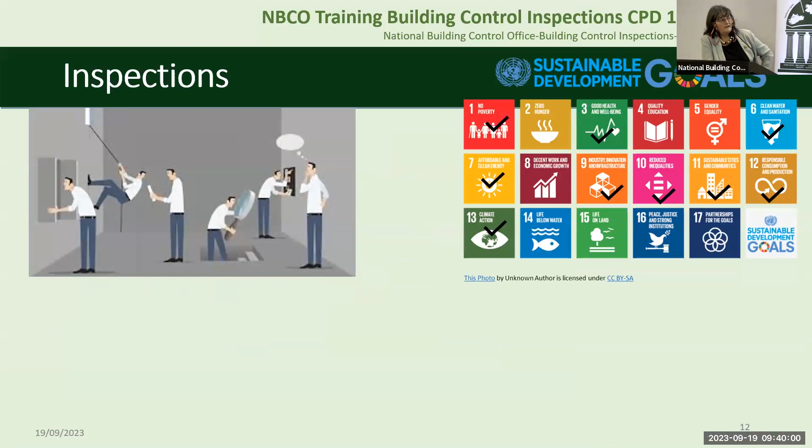Economic development, enabling economic development in every local authority. As I've said, and I can't help repeating it, promoting health, safety and welfare of people in or about buildings. It's about people in or about buildings, conservation of fuel and energy for people, and access for people with disabilities. So it's the health and safety of people we're talking about.

90% of us spend 90% of our lives indoors, so we need a healthy environment with good quality air, light, thermal comfort and water. We need to remember that. We're not just providing a bit of shelter from the rain anymore - we're providing places for people to live.

We promote regulatory compliance. We're an enabler of economic development, and we need confidence in the building industry for people - a good quality built environment, fit for purpose. Consumer protection - why consumer protection? Because the consumers are people. We need to think that we cannot deal with people and their buildings and houses separately.

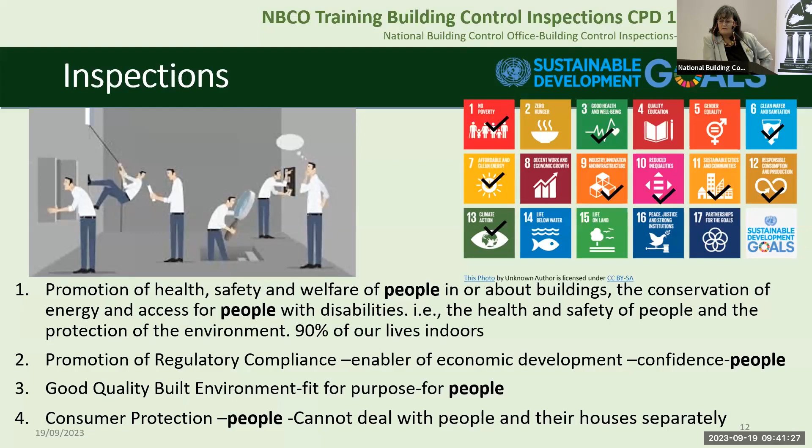So the building legislative framework - most of us know about this, but if you don't, that's it there. We have the Parent Act, the Building Control Act, which provides for the Building Control Regulations. They're the controls to demonstrate how you comply with the requirements of the building regulations.

Building control officers also have functions under the EU Construction Products Regulations, for which we are market surveillance authorities, and under the EU Energy Performance of Buildings Regulations, for which we must ensure every building, before it's opened, occupied or used, has a BER compliant with the requirements. So energy, health, safety, welfare - that's what that's about.

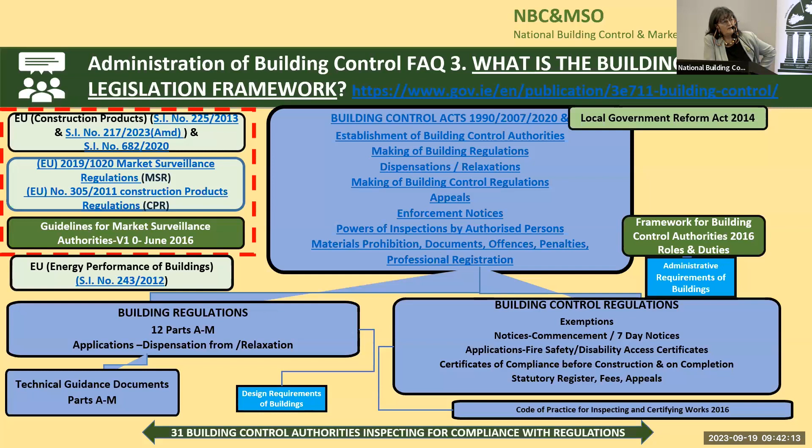Today we're talking about inspections, and building control officers are given significant powers of inspection as authorised officers under Section 11 of the Building Control Act. An authorised officer can enter a building at all reasonable times to inspect any building or plans following its completion, five years after completion, during its construction, or during the installation of any services, fittings or equipment.

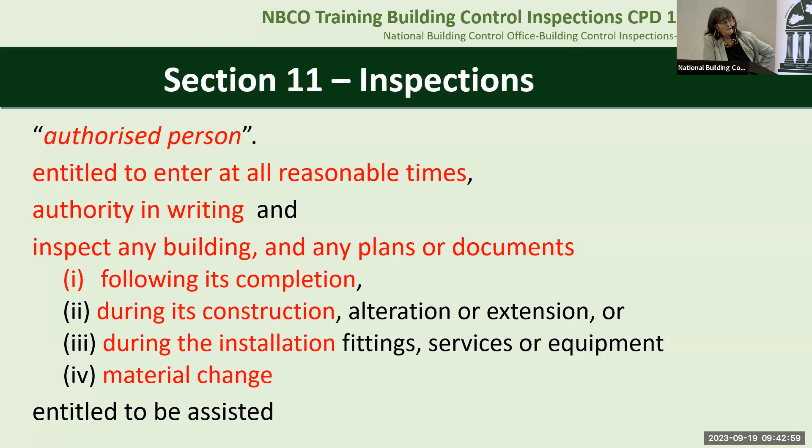Services, fittings or equipment come under Part L - conservation of fuel and energy; Part H - drainage and wastewater treatment systems; Part G - every time you replace a cistern; and Part J - your flues and chimneys. So they can inspect material change.

Regarding powers, they must be informed by the owner or occupier of the purpose of the building. What are you using this building for? If it's meant to be built for one family, why have you got 20 people living in it, made up of 3 families?

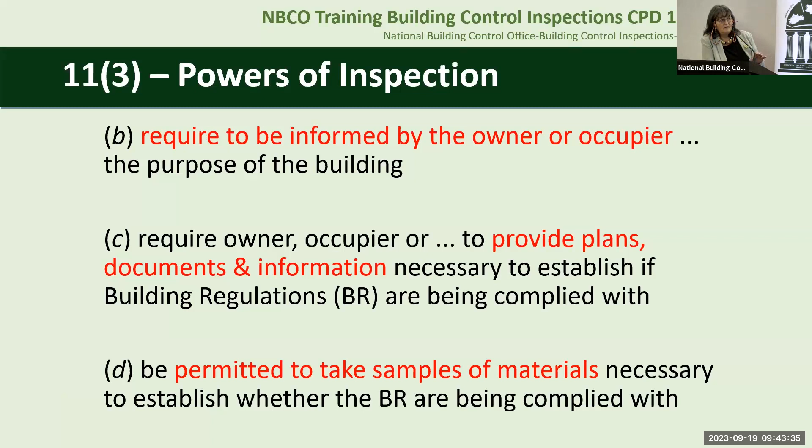They can require the owner or occupier to provide plans, documents and information necessary to establish if the building regulations are being complied with, and be permitted to take samples of materials necessary to establish this. So we can request information, request plans, documents, the use of the building, and take samples.

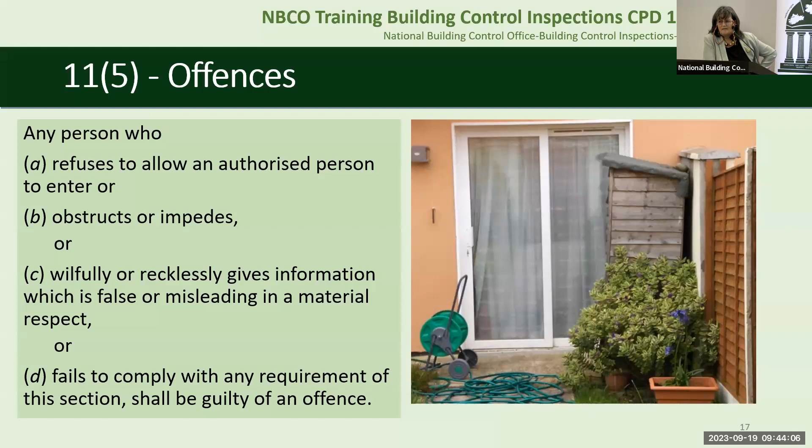We need to remember that any person who refuses to allow an authorised person to enter, or obstructs an authorised person, or gives false or misleading information to an authorised person, is guilty of an offence and can be prosecuted - no more than you would give false or misleading information to the Revenue Commissioners. You should not give false or misleading information to your building control. It's the same penalty, the same offence, a very serious offence, and people need to remember that.

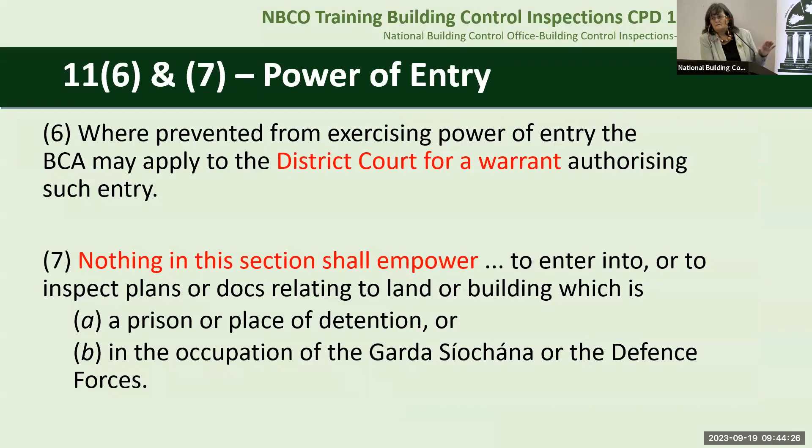Building control officers have power of entry, and if refused entry, they can get a District Court warrant and enter the premises. Under building control officers' regulations, and as most sensible people do, we stay out of Garda stations and buildings like that, and prisons, so we don't inspect those.

How do you demonstrate compliance? Why are we out inspecting?

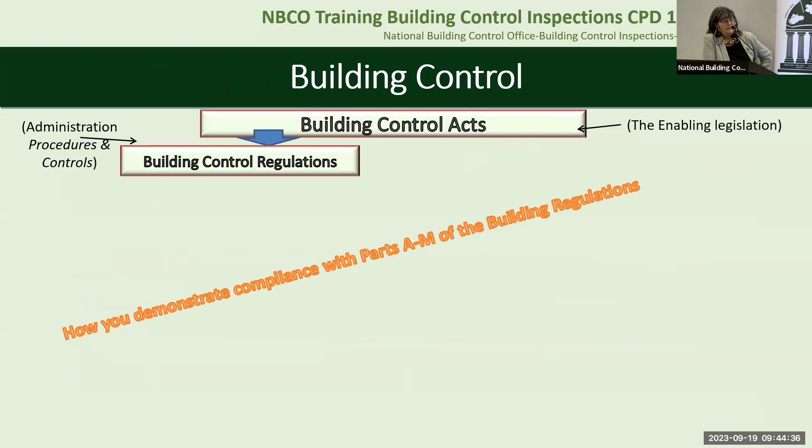We demonstrate compliance by our control tools. Our control tools are our notices to commence, where we demonstrate how we're going to comply with the requirements of the building regulations through plans, specifications, particulars, and online assessment. We apply for fire safety certificates and disability access certificates, demonstrating how we're going to comply with Part B, fire safety, or Part M, access and use.

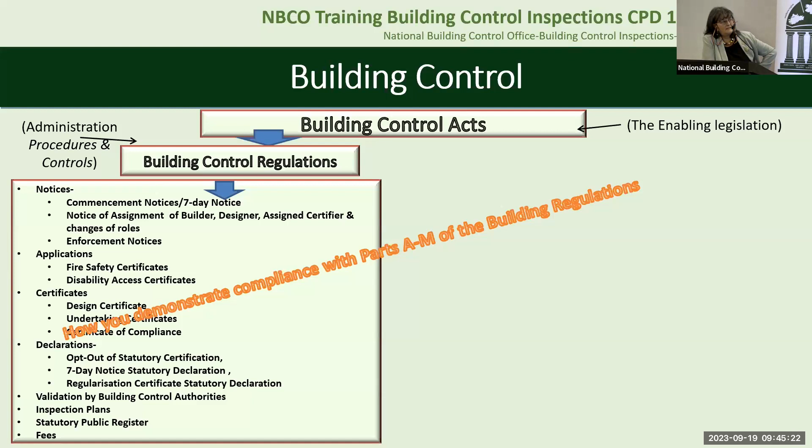The certificates of compliance before construction include the design certifier and assign certifier certificates, and then the certificate of compliance on completion. You have ancillary certificates, inspections, and plans. They're all the different controls to demonstrate how you comply with the relevant requirements of the building regulations.

Methods of compliance also include acceptable construction details, European standards compliance, Agrément certificates, design calculations, tests, and similar construction. So all of these things are methods to demonstrate compliance, and our further speakers will be speaking a little more in depth on those.

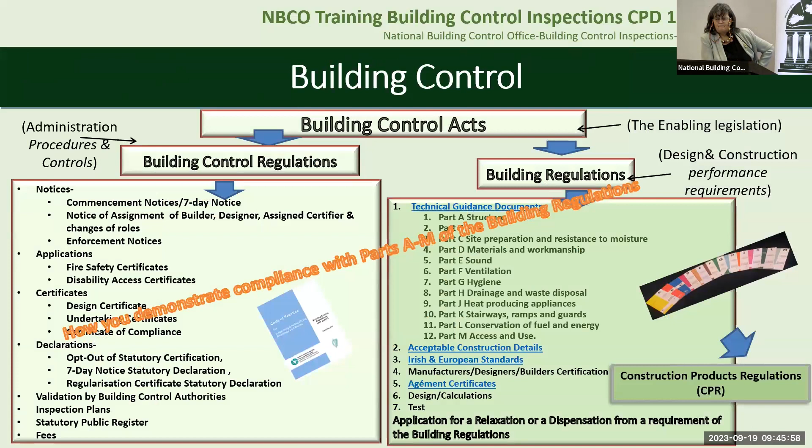Construction products regulations is a very important part of the construction process - every product must have a CE mark, a declaration of performance, and show the essential characteristics. So all of these things are very important.

Who's responsible for compliance is the next thing. Most building owners, and in particular owners of one-off dwellings, need to know that they're absolutely responsible for compliance with the full requirements of the building regulations. And if anything happens, they are the responsible persons.

The design certifier and the designer are responsible for compliance, and they must produce a compliant design for a building. They can't say, well, I was only told to design the plans and I allowed them to build off of those - no, you didn't. If you design a building, you must design for compliance with the building regulations, especially when they are construction drawings. Planning drawings and construction drawings are different.

The builder is responsible for building in compliance with the building regulations. It is not an answer, when asked to demonstrate how you comply, to say 'well, I'm just doing what's on the drawings.' That's all very fair and noble, but a builder must not blindly follow a drawing if the drawings don't comply with the requirements of the building regulations. They have an onus to comply, and must undertake their CPD annually, checking what regulations have changed. So builders are very much responsible too.

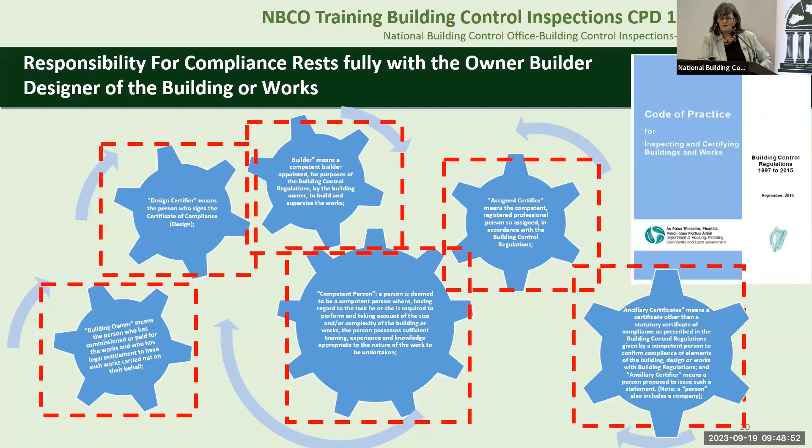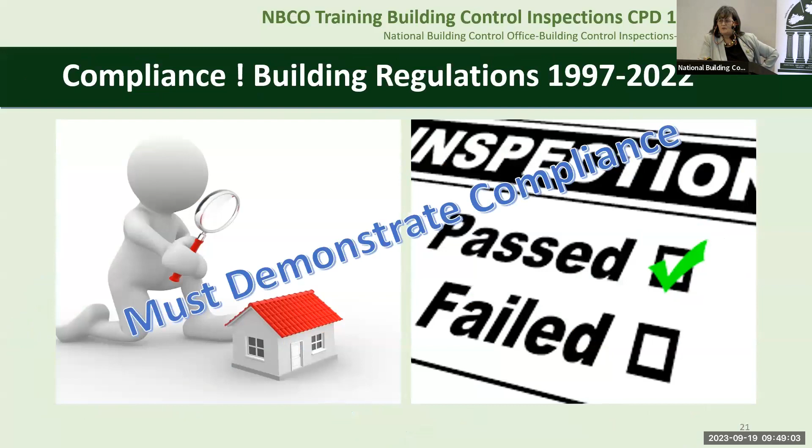And whoever is finishing up the building must make sure that everything comes together properly. So all these people are responsible - nobody should be getting out of this. Compliance with the building regulations - you must demonstrate compliance, you must show how you're going to comply.

We have very good guidance, including the code of practice for inspecting and certifying buildings and works. I would actually say that it doesn't really matter whether you're building a one-off, using a professional designer or an assigned certifier, or going for the opt-out of statutory certification - everybody building a house should read a copy of the code of practice for inspecting and certifying buildings and works and familiarise themselves with it. You're spending three-quarters of your income over three-quarters of your life on a dwelling, and you do need to do your research.

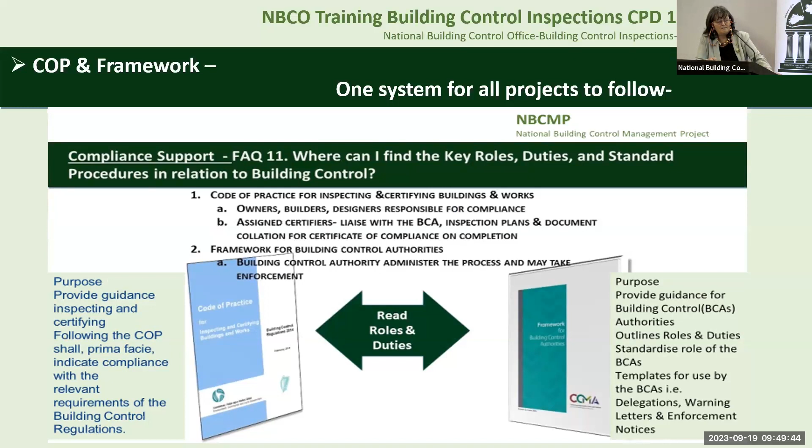The framework for building control authorities, which is under review at the moment, gives the roles and responsibilities of the building control officers. Everybody can read that, it's on our website, and check to see what the building control officer should be doing.

Compliance: you have the code of practice, and you have a lovely set of technical guidance documents which are easy to read, showing how you comply with Parts A to M of the building regulations for non-complex buildings. It's prima facie compliance if you comply directly with those.

Then you have standard recommendations. A lot of people forget about these. SR 325 is probably the most important national standard recommendation for the use of masonry structures in Ireland - how you construct using masonry. Masonry is concrete blocks, and we need to all be reading that. SR 16 covers mortar, renders, and concrete, and SR 21 covers underfloor fill. I'll talk more about all of those later.

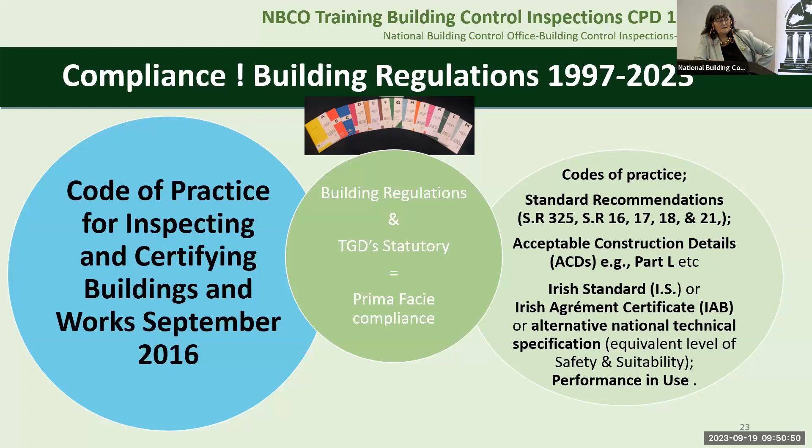Acceptable construction details are very useful - a set of acceptable construction details on the department's website for Part L. You have Agrément certificates, alternative national technical specifications, and performance in use. We have a lot of things with performance in use for products that we know work well if constructed well. We've never really tested them, but they work very well in use.

So you have your CE marking for your products, your declaration of performance, and your essential characteristics are very important. Everybody needs to know that if they buy a construction product, they must get the paperwork, read the CE marking, read the declaration of performance, check if the essential characteristics on that declaration of performance are suitable for the intended use - are they fit for purpose. That is very important for builders, designers, owners, and assigned certifiers.

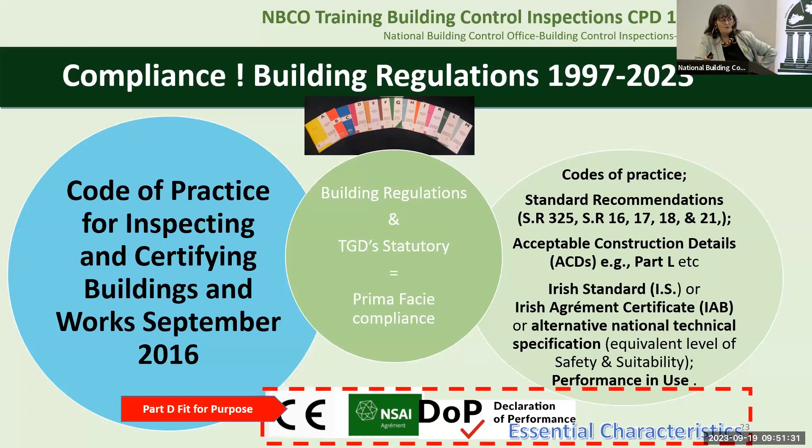As I said, you have the acceptable construction details - very nice, easy to read documents for anybody building a house. Your code of practice, commissioning and installation of ventilation systems, thermal bridging with lovely diagrams, how you comply with Part A, Part B, K and M together, supplementary guidance on design of stairs, and a guide to marketing of aggregate concrete blocks. If you're using a block in your building, read that - there's only 14 pages in it.

Excellent. The Agrément certificate is very important, but just remember that when you see a BBA, that's not Ireland. You need to check that every Agrément certificate certifies compliance with the building regulations - make sure those are Irish building regulations.

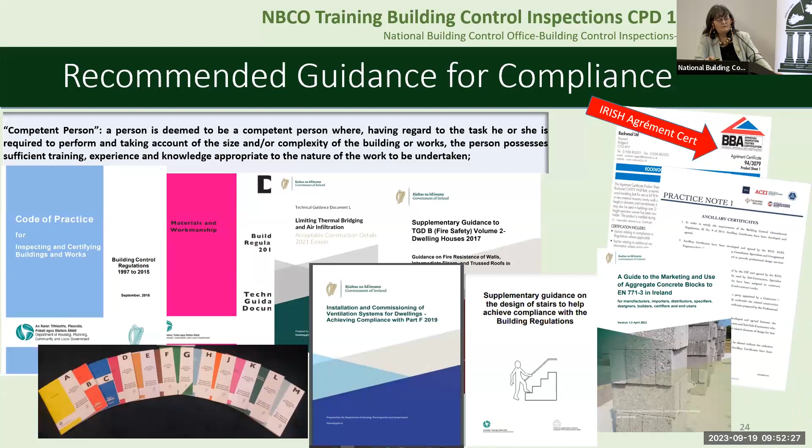And then, as I said, you have the practice notes from the professions and ancillary certificates - there's a whole range of ancillary certificates, and I'll talk a little more about others. Very important documents, a very important part of compliance. When we're out inspecting, we get a lot of Agrément certificates. Agrément certificates are very useful compliance tools, very useful for ancillary certification - but what do they actually mean?

If a builder gets an Agrément certificate, they must read the instructions - others will talk about this more. Where was it to be used? A Scandinavian house is built for Scandinavia, not the west of Ireland. So you need to look and see, is it suitable for very high driving rain index areas?

Does it have a requirement for a competent installer? If I get an insulated concrete form house Agrément certificate, am I using the correct render that's specified in the Agrément cert, or do I go and find a cheaper render and stick it on? Then it's not compliant with its Agrément certificate. Are there particular things in the Agrément certificate that say this will require maintenance after 15 years, or this will require replacement?

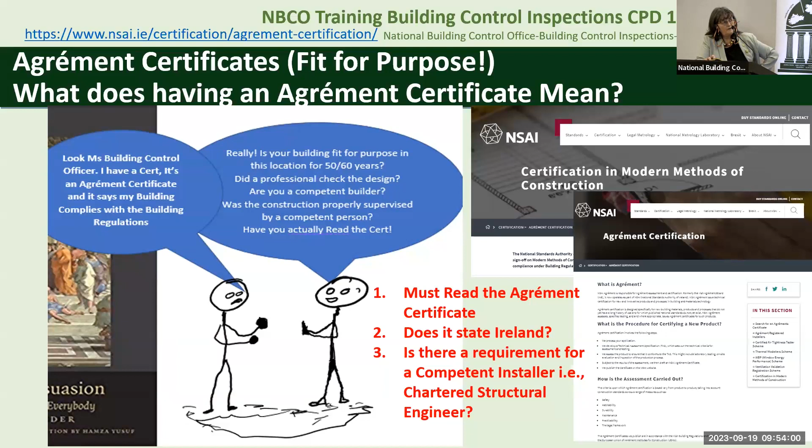So the Agrément certificate is a very, very important compliance tool, but it needs to be read by those using them and using the products they refer to. Any deviation from an Agrément certificate means it's not compliant with that Agrément certificate.

Modular homes - we see a lot of those on our inspections these days, an excellent method for solving our housing crisis. We've been using modular homes for many, many years - you'll see the little Avonry buildings built in Kilkenny dotted around the countryside that were built for 20 years. They're still here, could be 50 years later, providing very nice homes for people, built properly in the right locations. We've had some prefabricated buildings for years.

We've had timber frame for many, many years, very successful. The big thing is that they are part of our construction process, but we need to construct them properly in accordance with the manufacturer's instructions. So what we're seeing on sites is the gap between the off-site manufacturing in the factory and the site itself. You get a couple of lorries coming to your site with all your good quality pieces of kit for your modular house, and then you have nobody on the site to actually supervise that interface between taking that off the lorry and putting it on your foundations. So that's a very important part of this.

And then modular, they can comply with all the relevant requirements of the building regulations. A bit of innovative design, and we've seen many modular housing constructed very well for refugees, for Ukrainians, and quite quickly. So another useful type of design, but you need to watch, they need to be inspected. You need the right people that are competent to actually build them, and they need to be fit for purpose, and they need to be suitable for the location that they're putting them in.

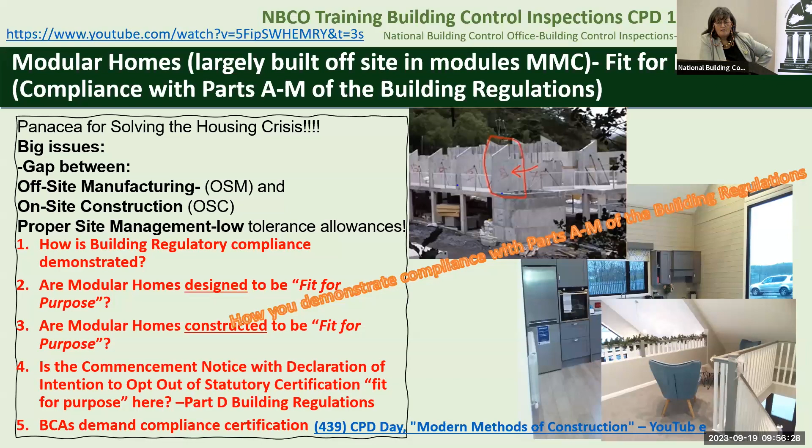Make sure that your location is sheltered, read your certification, make sure your driving rain index is fit for purpose for the type of building that you're putting on your site. Everything must comply with Part D of the building regulations, that all materials and workmanship must be fit for the purpose for which they are intended for the lifetime of the building, and the lifetime of all dwellings is 50 to 60 years, full stop, not anything less.

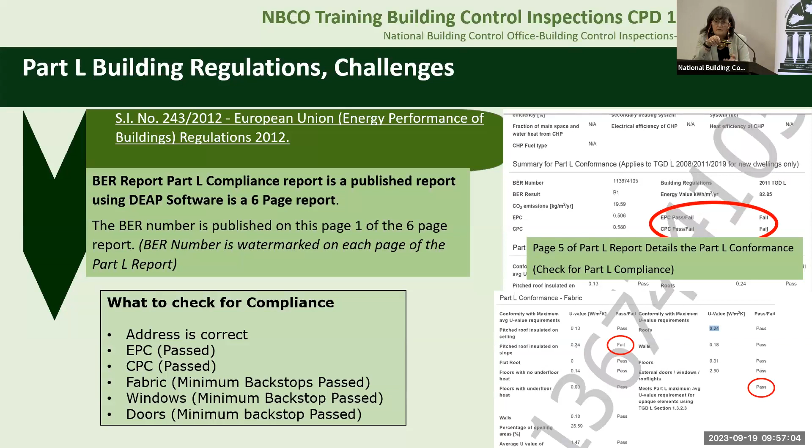Again, these are other little inspection issues that we find. Every building, before it's opened, occupied or used, must have a BER, which must be on the register of the SEAI. But here's a BER that somebody picked up that came in for compliance. Watch out for the fails. It must pass everything on the BER. U values, the EPC, the CPC, they must pass. There's 4 fails on this BER certificate, but they have a BER, there's a certificate. But actually, no, sorry, you haven't, it's failed.

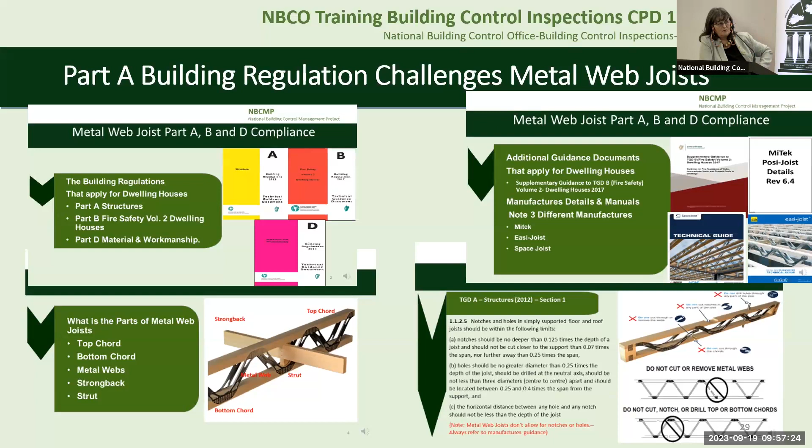The other challenge that we see on sites, metal web joists, used quite commonly, very good for construction if constructed properly by the competent person. Make sure they're the right way up, make sure again you read the manufacturer's instructions. And these are all the little things that building control officers, when they're out on sites inspecting, will be looking for.

Again, another thing we're looking for, as I said, remember the standard recommendations for the use of a product in Ireland. Every product must be CE marked. Certain products have a standard recommendation for the use of that product in this country because of our specific climatic conditions, because we are the island on the edge of Europe and we're beaten by the huge vast sea between ourselves and America that's whipping in there all the time with winds and rain and everything. We're not sheltered. Most of Ireland is very highly exposed, and that's a reality. So we must have our standard recommendations for the uses of those products here in this country.

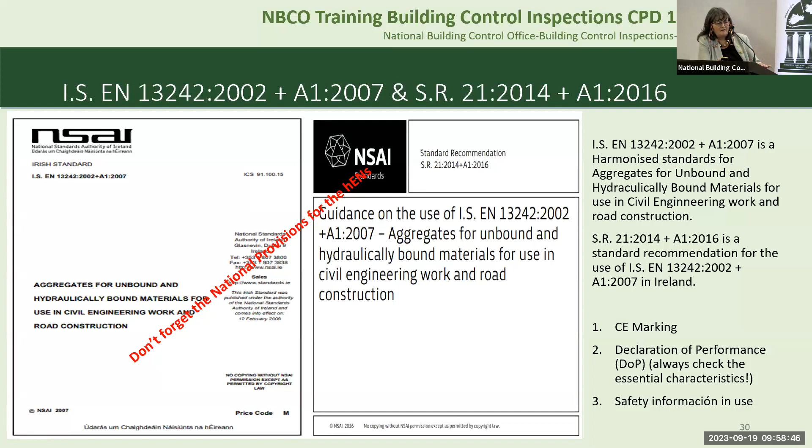The SR21, every building control officer on inspections will be saying, have you got your SR21 certification for your underfloor fill? If you're building an ordinary size house, we'd need to see about 400 tons of that, not just one lorry load. So the thing of just buying one certificate to suit the building control officer, you're really fooling yourself. Builders need to be quite adamant that they collect the certification for all their products and have it available when the building control officer comes on site.

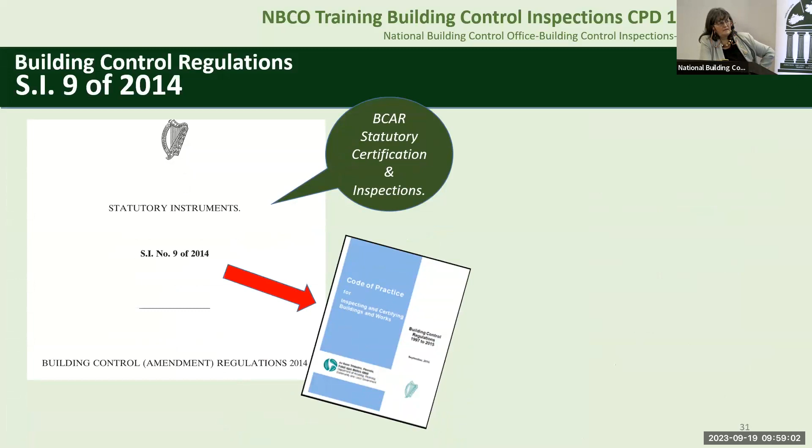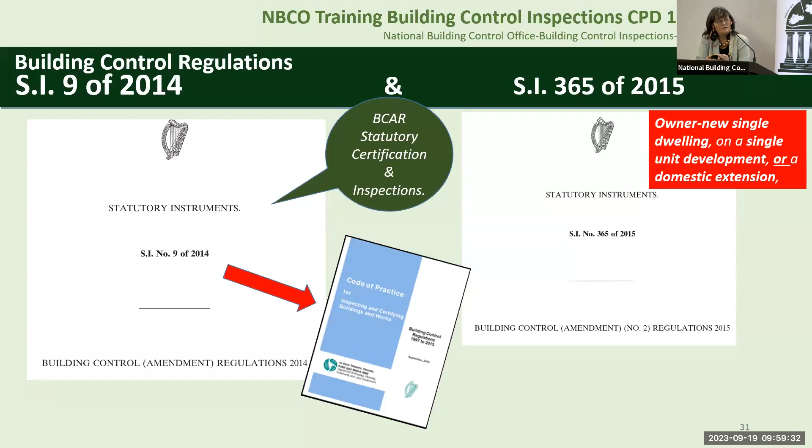What we have is what some say is maybe a two-tier system for construction. We have our SI 9 of 2014, which requires that we have professionals involved in all aspects of the design, through to construction, through to inspection, through to certificates of compliance on completion for a building. And then we have SI 365, and this provides that certain buildings on single sites, dwellings or extensions, can opt out of this statutory certification, meaning that the professionals they employ do not have to be registered members of RIAI, Engineers Ireland, or the Chartered Surveyors, but they still must be competent.

So they're only signing a declaration to opt out of statutory certification. So when we go on site to one of these dwellings, we need to see the same certificates that we'd be looking for from competent people elsewhere. Everybody reading this should read that information note for owners of new dwellings and extensions who opt out of statutory certification.

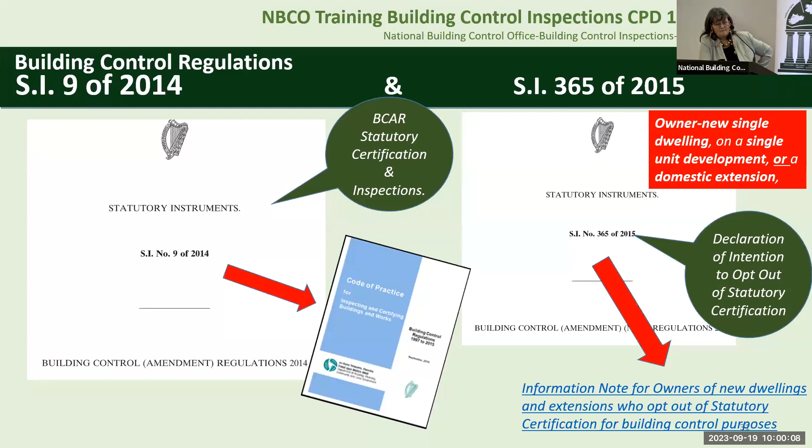You're not opting out of the building regulations, you're opting out of only statutory certifications. And for those two types of construction, which are the same constructions but have different people overseeing them, they need to be fit for purpose, they must comply with the relevant requirements of the building regulations in such a manner as to avoid breaching any other requirement of the building regulations.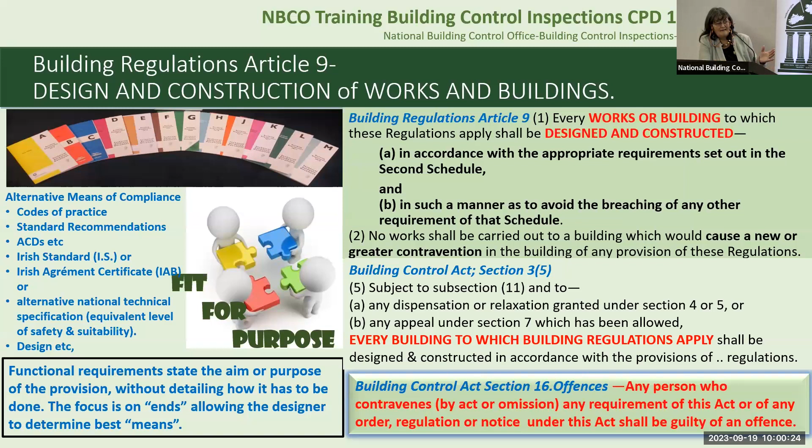So there is no get out clause here. They must submit, for the two of them, specifications and particulars as are necessary to outline how the proposed works or building will comply with the requirements of the second schedule of the building regulation. So when a building control officer checks the commencement notice, they must see the very same schedule of plans, specifications and particulars for the two of them.

They must see the very same general arrangement drawings, so they must have a general arrangement drawing. They must have a schedule of plans, calculations, specifications as requested in question 6 of the commencement notice. And we'll be talking a bit more about this in our next CPD day in validating these commencement notices.

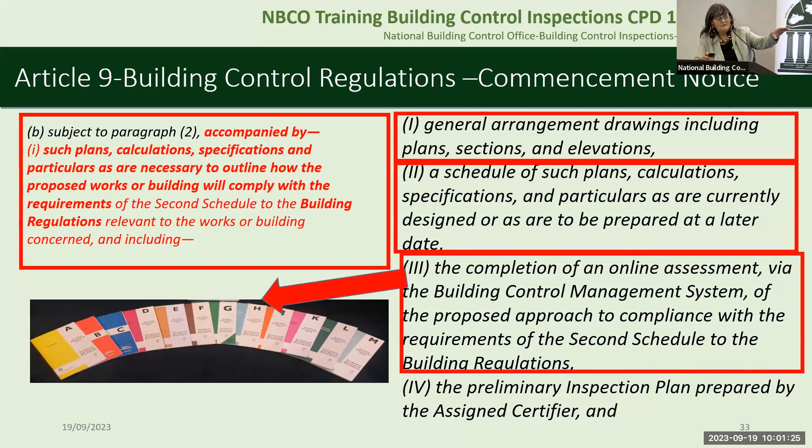They must all complete an online assessment via the building control management system of the proposed approach to compliance. So it doesn't matter whether I have the assigned certifier approach or the opt-out declaration approach, I must do all of these things. The only difference is the preliminary inspection plan and the certificate of compliance on completion by an assigned certifier.

The online assessment, I must show how I'm demonstrating with Parts A to M of the relevant requirements, so I must fill in all of these. So I'm an owner of a dwelling and I'm going to opt out of statutory certification, so I must be competent to do all of this myself. So that's what you're saying, really.

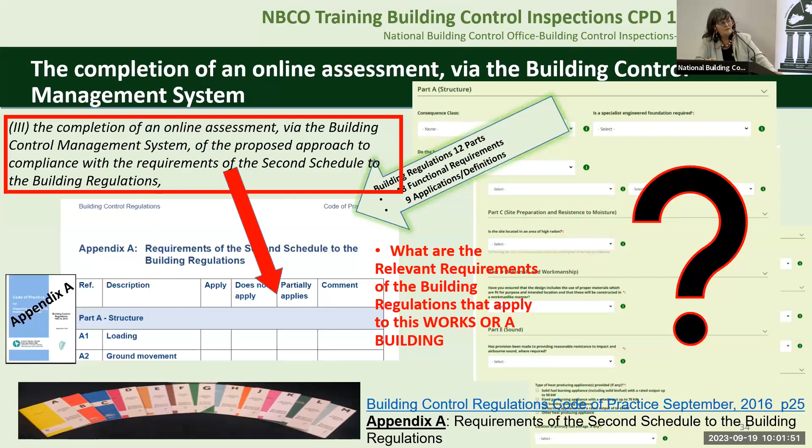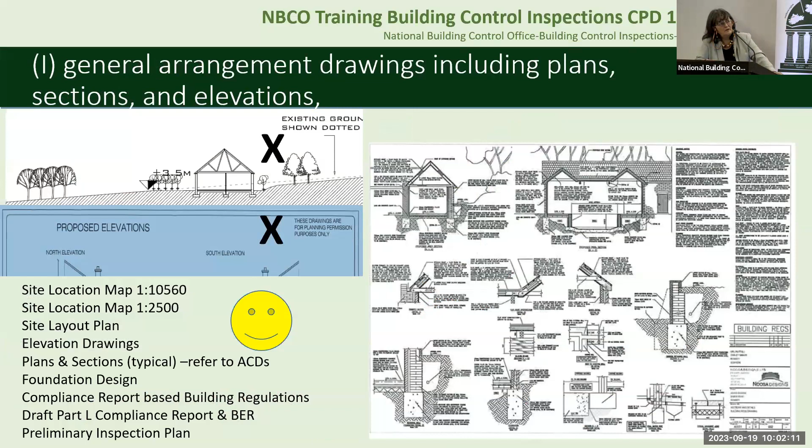I must give my general arrangement drawings. My general arrangement drawings, they can't be at this side, they must have all of those details, detailed out, the critical junction details, the roof details, the foundation details, all of that. That's what we need to be seeing for the one-off dwelling and the dwelling that has the assigned certifier.

I need to see that you're complying with the masonry. You have SR21, you have 771 or 771-3 if you're using concrete blocks. I need to see 13914 for the renders. So all of this must demonstrate compliance.

So people need to think about what they're constructing. They're dwelling for their life and probably the life of the next generation or the next 2 generations. Three-quarters of their income for three-quarters of their life, and they need to make sure that they comply with all of these.

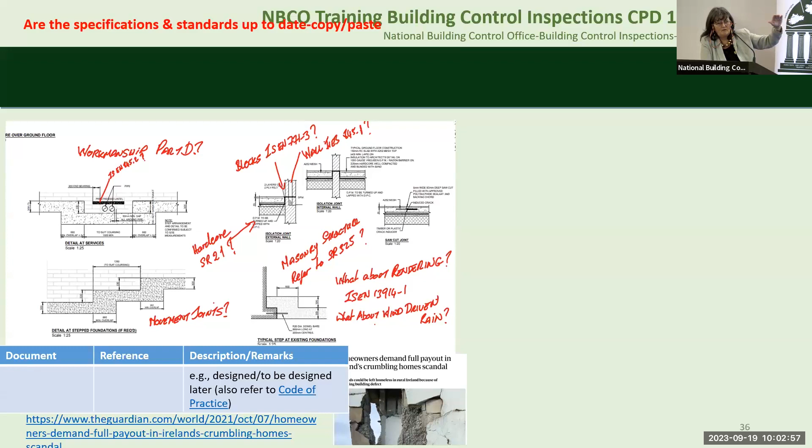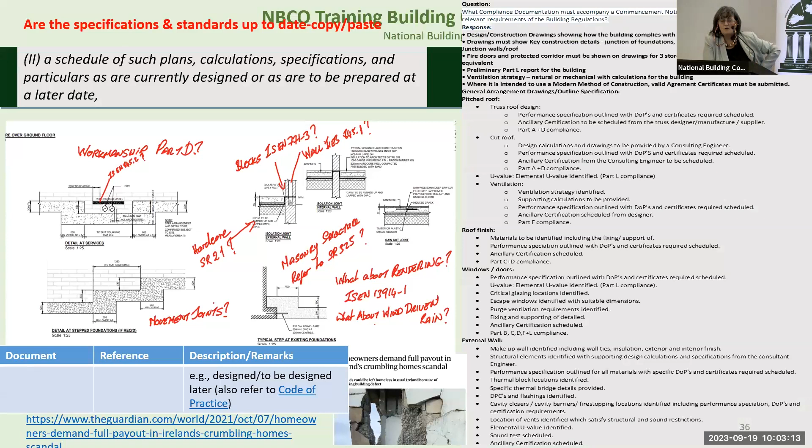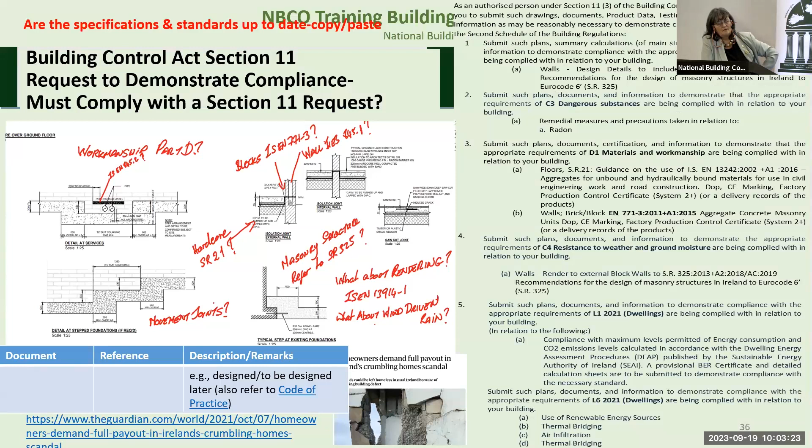The dwelling with the opt-out must have all of these drawings and design. They must design the roof, the external walls, the windows, the door finishes, the wall finishes, the roof finishes. So we need to see a list of drawings coming in which at least has details of all of those. The building control officer can request a Section 11 request and ask for all of those details. And they must be included in the schedule of plans, calculations and particulars.

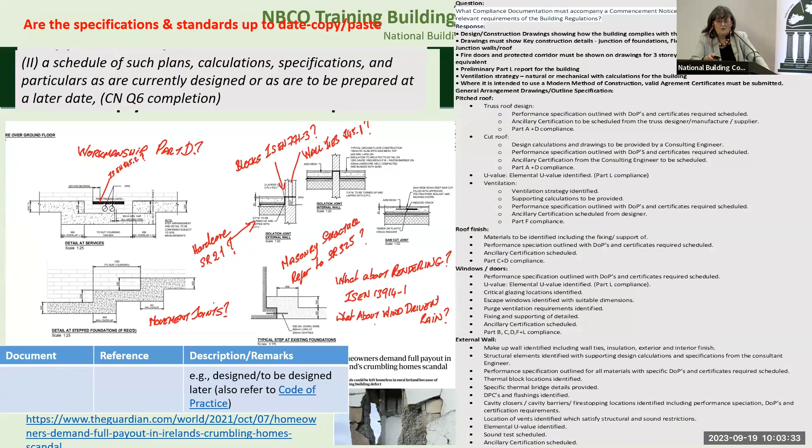So really effectively, you're only opting out of having a professional, a registered professional. You're not opting out of anything else, and you must do all of the work yourself.

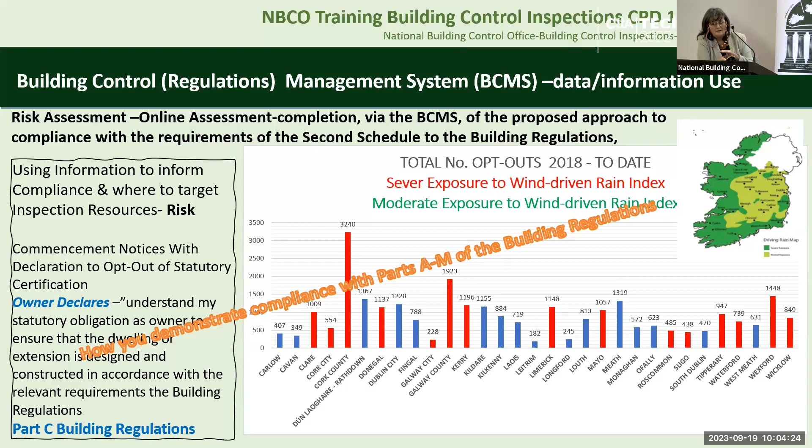All the reds there you see is the severe exposure to wind-driven rain index in Ireland of all the counties, and they are overlapped on where people are using the opt-outs. So in the most highly exposed areas in Ireland, we have people building dwellings using the declaration to opt out of statutory certification, where they probably need the professional most. So we need to think about that one.

These are all our standard recommendations that we need in every building. SR16, the use of the EN 12620, that's aggregates for concrete. SR21, your aggregates for your underfloor fill must comply with that.

So every person that is building a house must be able to show a building control officer, there's all my SR21 certification for my underfloor fill. There's how I've demonstrated compliance with my SR18, my plaster, my render, that's what they've used, that's the aggregates they use. There's the certification. And they've put 3 coats of render on the building because I'm in a very highly exposed area, and one of those coats is not the scud coat.

I didn't get a professional designer, but I learned all about SR325 in school, and I've designed my masonry construction to that, and I have all my construction details in accordance.

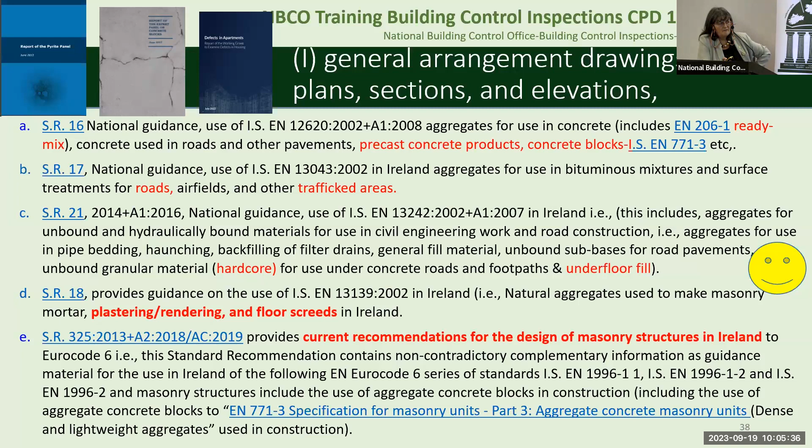Construction is a science and needs to be done by competent people. Everybody does need to read a guide to the marketing and use of aggregate concrete blocks. If you're building that building there, you'll need to read that. You'll need to ensure that all of your details have the standard recommendation certification for that, and I've constructed in accordance with SR325.

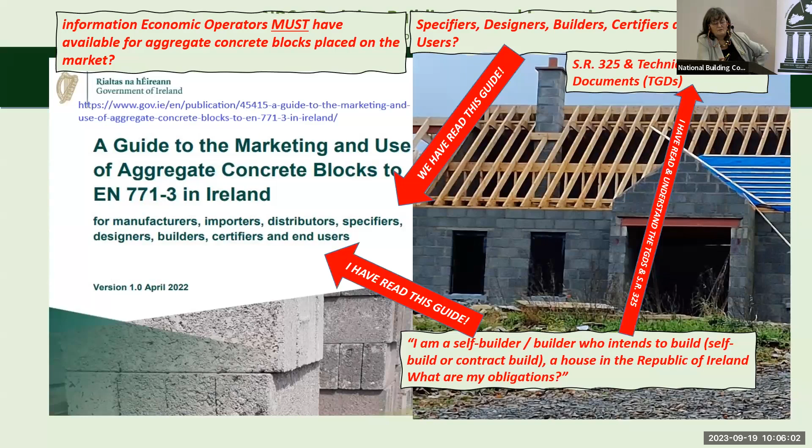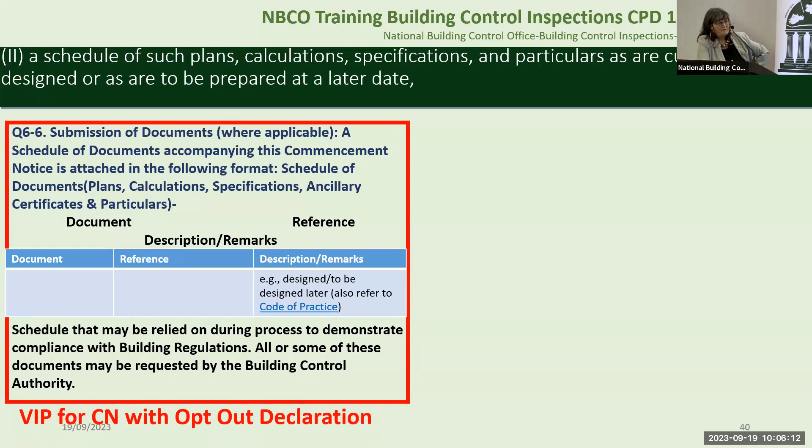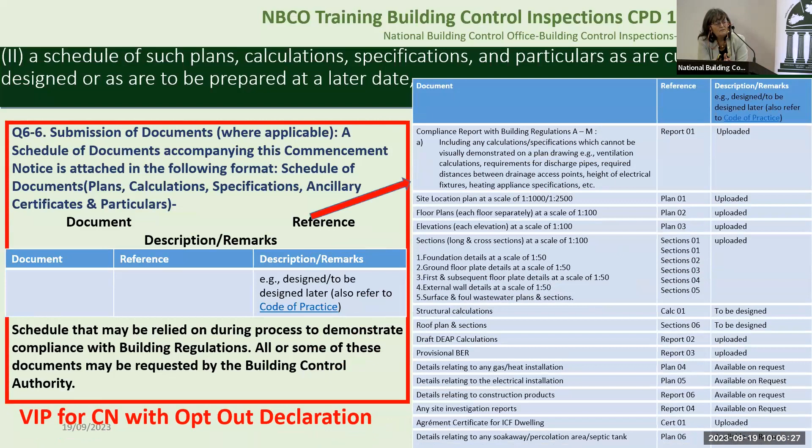As I said, the submission of documents is very important. It's very important for a commencement notice with opt-out declaration. You need to have all of this, and all of the drawings that need to be submitted with it. This is part of our inspection process, to check what documents you've submitted. We go out on site then and look at the compliance with the building regulations. So all of these are a very important part of the process.

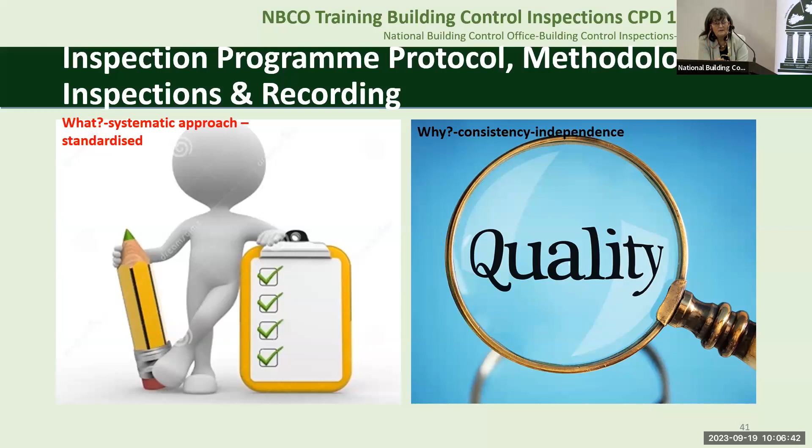We have an inspection program protocol for the 31 building control authorities, and that's to provide for a standardised approach of how we carry out building inspections across the country. That's just part of it, and it's on our website. We carry out risk-based inspections, and that's how we determine where the riskiest parts are, where we assign our people.

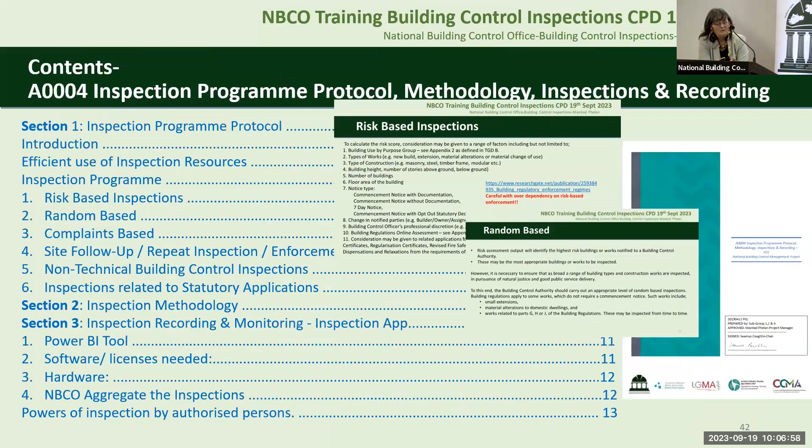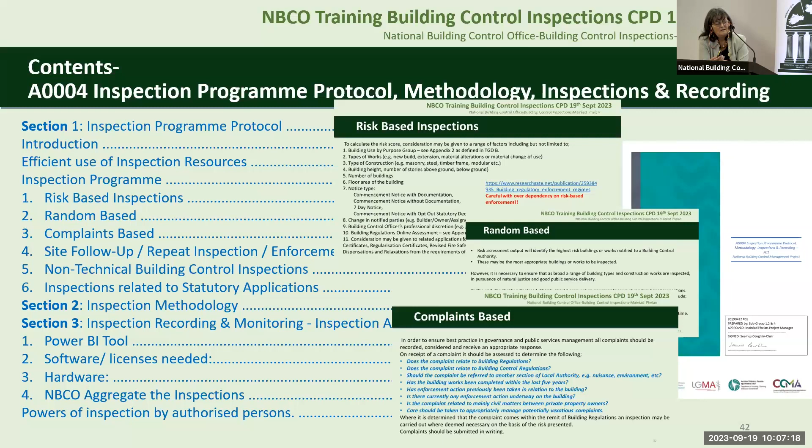The over-reliance on a risk-based inspection system can be a huge risk itself, so we carry out a certain amount of random inspections, and then we have a certain amount of complaint-based inspections, where somebody might be complaining that the builder didn't do the work right, or maybe an assigned certifier is complaining about their own site, or a designer saying they're not designing to my design or whatever. We'll take any queries to the office, and we will inspect them, because what we want is compliant buildings.

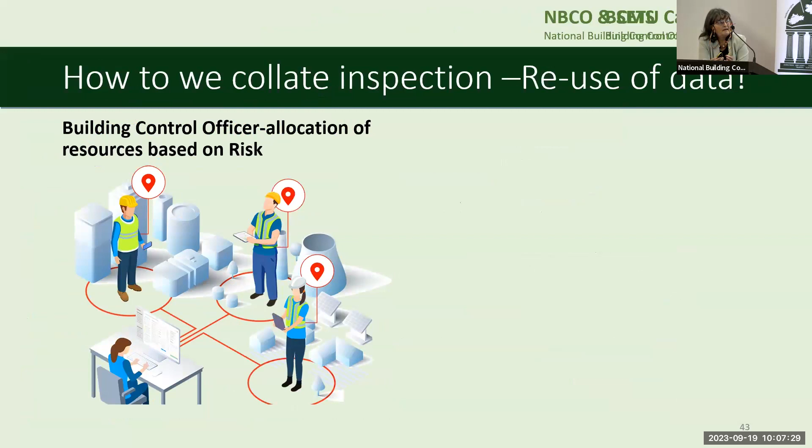We keep a record of inspections. Most building control officers have some form of mobile app that they record their inspections on. That's our one - we can use our phone to collate it. Those are just the details that we can pull out for our risk-based inspection regime.

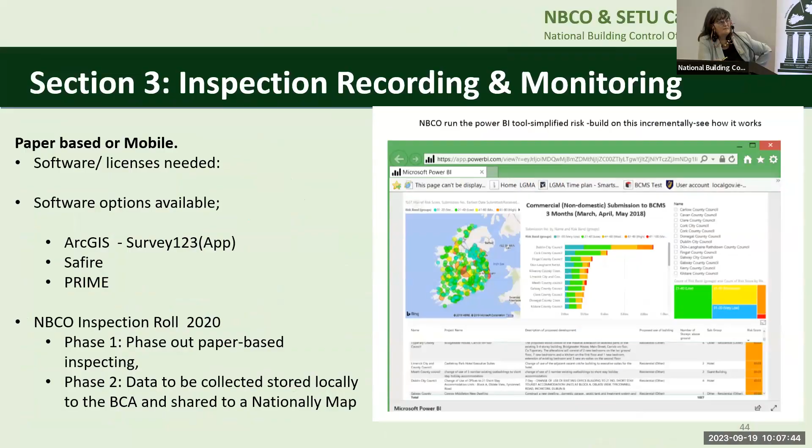Really what we're looking at is that inspections are the most important part of the building control process - visibility on site. The building control inspector can be a great assistance to any building homeowner, designer, or assigned certifier in providing guidance on how you should comply. They don't certify, but they have a great wealth of knowledge.

People that are building their homes in Ireland should actually know who their building control officer is in each local authority, and be able to call them up and say, look, do you want to come out and do an inspection, or can you give me some guidance on this, or ring our own office on it.

We need competent people, we need meaningful inspections. We're very aware that construction of all forms is very welcome, because we have a Housing for All huge building programme, and each form of construction is welcome, but they can all comply with the building regulations. Some of them require more detailed inspection and innovation than others.

Processes and product specification are very, very important. It's kind of depressing at times when you come across the same thing - you find the same faults and people are not watching them.

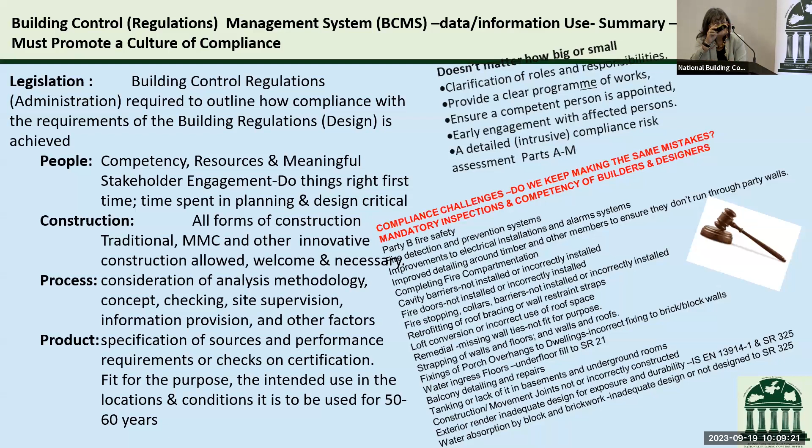So I've just taken out the compliance challenges, and they're the very same there - Part B fire safety, detection, fire prevention systems, cavity barriers, etc. That list is in the defects in apartments list. It's been going around for a long time. We need to be getting rid of those and have them very, very rarely.

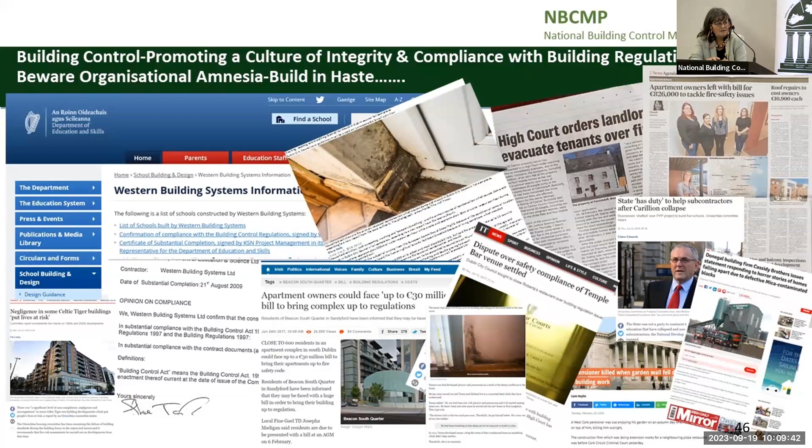Why? It costs the exchequer a fortune. The welfare and health and safety of the person in or about buildings is affected. It's not conducive to good circular economy or mitigation against the negative effects of climate change. We all pay for it eventually, one way or another.

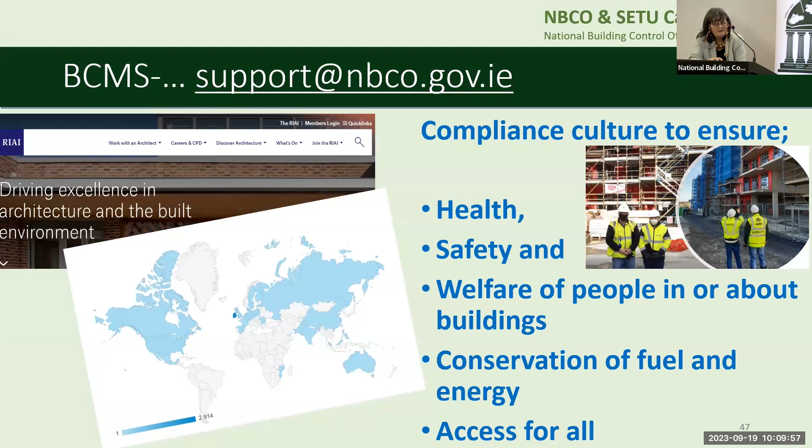Compliance culture is essential. We must start thinking why we need to comply - safety, health, welfare of people, conservation of fuel and energy, access for all. So when building, you're not just building for your own shelter - somebody else is going to have to live in that building, for 2 or 3 generations.

Every building built before 1975, seemingly, European research has demonstrated it'll still be in use in 2050. So build once, build it right, comply with the building regulations, make sure you have competent people. If in doubt, ask your building control officer. We are here to be visible on site and assist. Thank you very much.